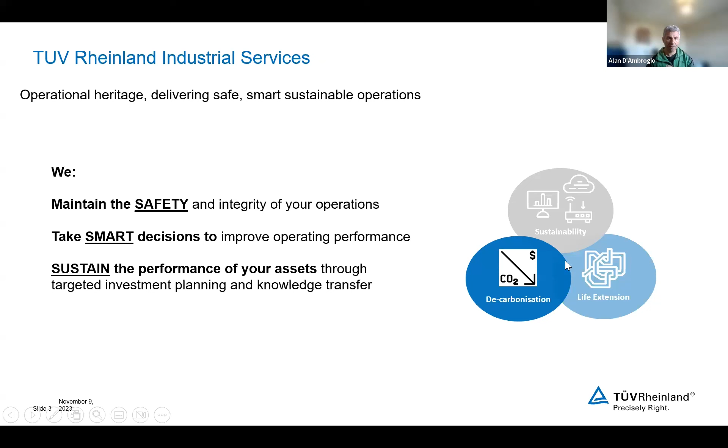You can see we've got three drivers in there around sustainability, helping customers decarbonize, and also extend the life of their existing facilities. You'll see elements of all three of those in the presentation today. I'm only going to show one slide on this because the case study on the right-hand side is what a lot of the webinar will be on today, that Conal will take you through. So I'm not going to show any more of that.

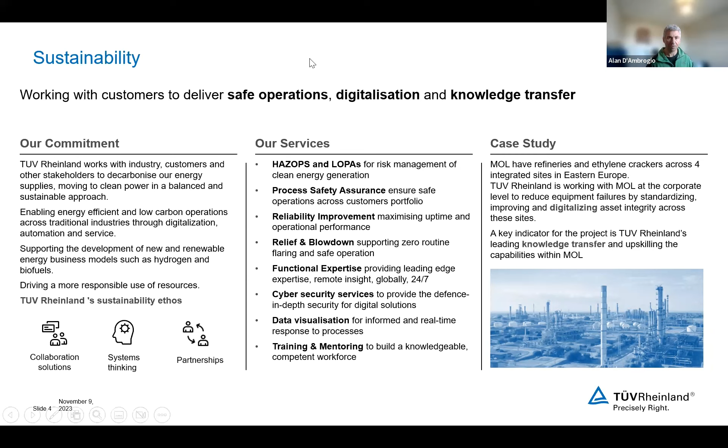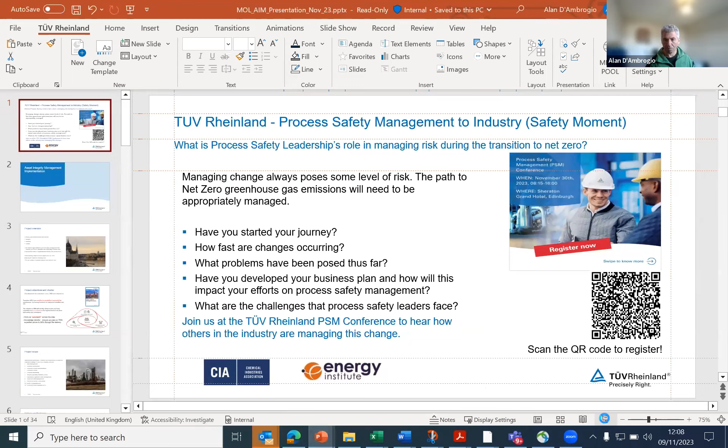Just thinking of what sort of safety moment is in there - we put this safety moment. This is a PSM conference where we're trying to work with the industry in sharing energy transition, but also helping people maintain their process safety, a lot of it tied to asset integrity. If anyone's interested in collaborating, working across both UK and globally around process safety, I think it's a great opportunity to come along, hear what we've got in TÜV Rheinland, and also how different operators approach this - majority of the speakers are from operators. This is sponsored by the CIA, Chemical Industries Association in the UK, and the Energy Institute.

Majority of speakers are not TÜV Rheinland - they're operators who are trying to maintain safe operations, and really looking at how do we manage PSM as we go through energy transition. We're seeing hydrogen being introduced into a lot of sites. We're seeing a lot more co-mingled sites being generated as we go through this energy transition. So great opportunity if some of you are available. This is at the end of this month, 30th of November.

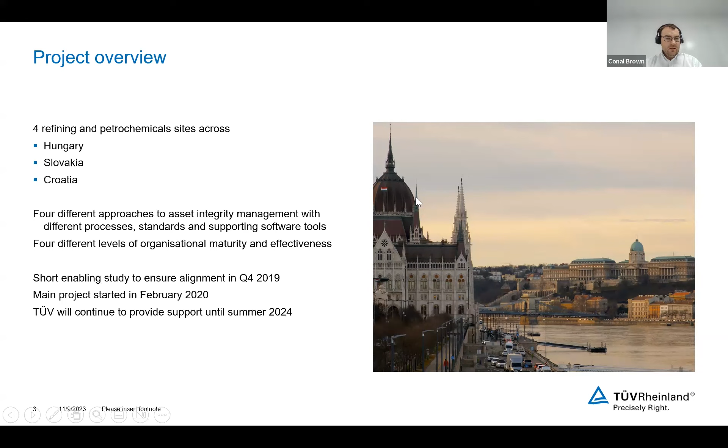The objectives and charter for the project were to transition the organisation from a reactive to a more predictive, preventative maintenance and inspection organisation, by basing decisions on equipment condition and the risk of failure.

The Central European regulatory environment is very compliance driven, and as a result, their inspections were quite compliance driven. So they were inspected to the regulations rather than inspected to the risk.

So the idea was, by adopting asset integrity management systems, they'd identify the most critical assets and focus inspection and remediation activities at the highest level of risk, both in terms of safety and production, and therefore improve performance, improve uptime, and as a consequence, reduce operating costs.

As much as the KPI outcomes, the idea was to get one team working across the site - one asset integrity organisation working in a common way across the 4 sites - and also to transfer knowledge into the MOL team so that they were capable of sustaining the integrity program once we'd stepped away from the project.

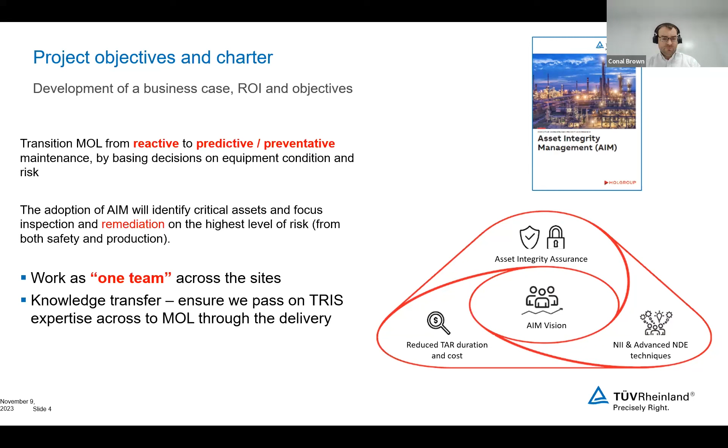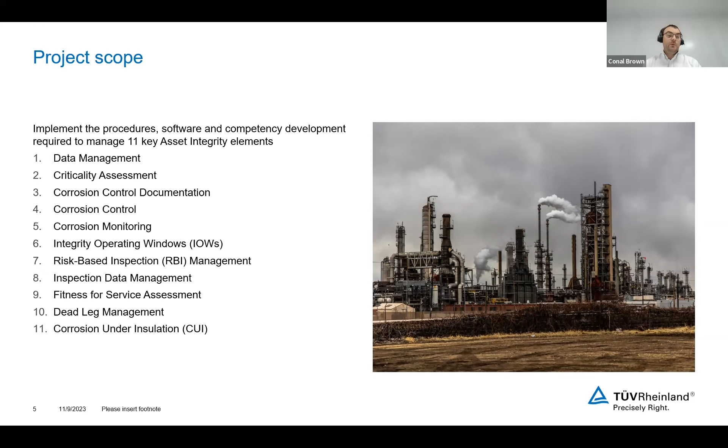So the scope of the project related to 11 key asset integrity elements. This might not be the full scope of everybody's asset integrity program, but this is what MOL wanted to include in scope: data management, criticality assessment, corrosion control documentation, corrosion control and monitoring, integrity operating windows, risk-based inspections and risk-based inspection management, more general inspection data management, fitness for service, dead leg management, and corrosion under insulation.

And then the delivery methodology for this project had - like I say - there was a short enabling phase just to get the alignment on the vision and agreement on how we work together. But the main delivery phase had 3 phases.

The first phase was to show. So this was where TÜV experts in RBI and materials showed the site how to work in an effective asset integrity management program.

So the first point of this was to develop procedures. We agreed on the scope and content for some procedures, then we went away, wrote the detail, and then the MOL team commented and bought into those procedures, and we agreed that was the way we were going to work on the project.

And then we started to implement according to the procedures, do the work, and we'll introduce what that involves in the next slides.

But basically, the TÜV team was leading the work, and the MOL team was supporting the process, providing the data, reviewing the outputs, and learning as they were supporting this. Then in the second phase, we moved into teach and coach.

So this is where we were working collaboratively to deliver the project. The MOL team were starting to deliver the reviews themselves with TÜV support, and while we were doing that, we were teaching and coaching the MOL personnel, getting their competence up to the level where they were ready to deliver independently.

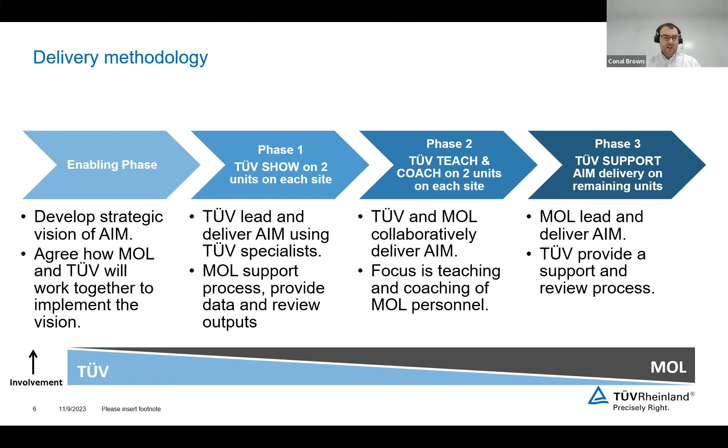Some of these crudes are much more aggressive, and of course the integrity consequence of that means that this distillation unit has got a lot more possible degradation mechanisms, and it's subject to a lot more degradation risks than it was originally designed for. So a lot of integrity challenges for this unit.

Within this project, we reviewed a number of static equipment items - vessels, tanks, piping systems, and safety valves.

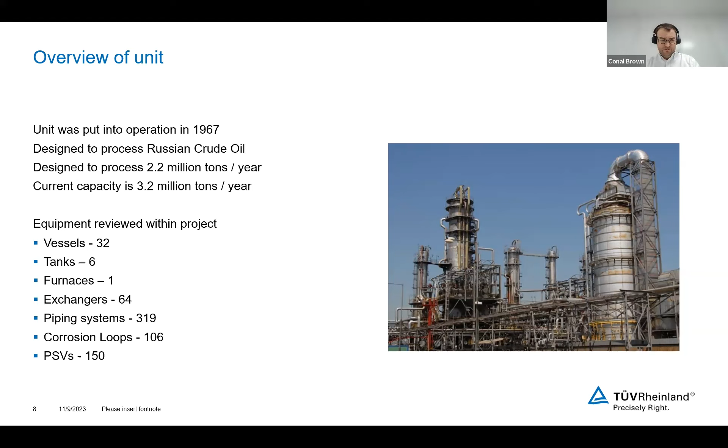The first step was to do a criticality review. We reviewed a total of 105 vessels and identified that 11 were critical, and identified 106 piping circuits and identified that 48 of those were critical. The criticality matrix was a simple 5x5 matrix.

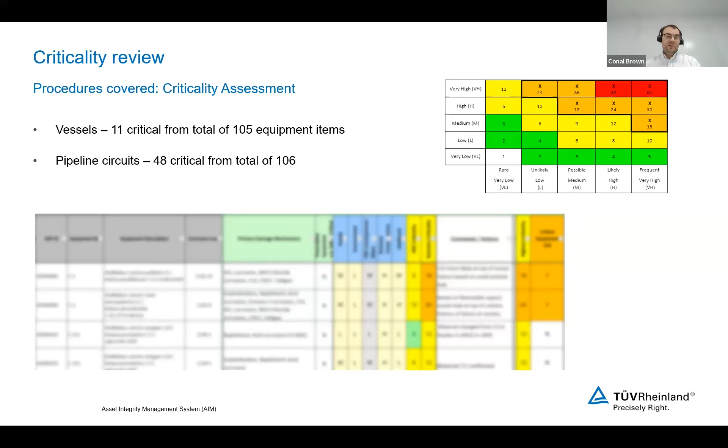Those critical items we took forward into RBI, and the non-critical items still went through a risk-based approach, but with less detail, allied to the lower criticality score that they got.

In terms of information and management of data preparation, we had to collect an awful lot of data with the support of the MOL teams. We gathered that information together and imported it into the Visions software. Then we supported the creation of the corrosion control document.

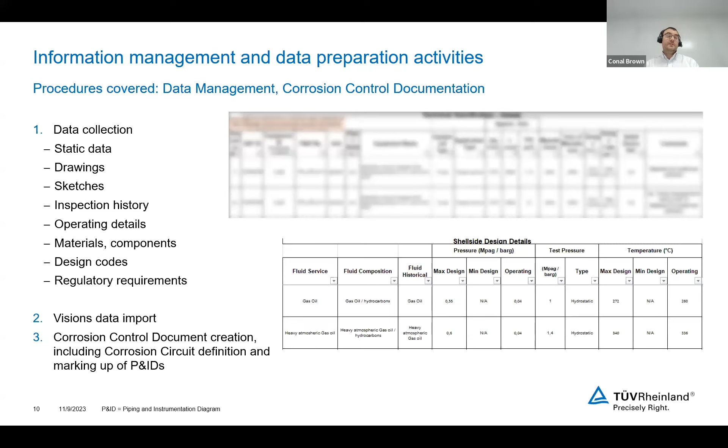That included defining the corrosion circuits, marking up the P&IDs to identify what the circuits were, and then putting the detail into those CCDs, corrosion control documents, at the circuit by circuit level.

Then we did the equipment reviews. In the project, we split this across two phases. In the first phase, the sessions were led with TUV with MOL support, and in that we did 41.

RBI for the critical items and inspection plan reviews for the non-critical items, and for piping we looked at 49. So at the end of the first phase, the TUV team led the production of those 90 inspection plans, some of which started with an RBI, others which didn't, but they did the other elements. We looked at IOWs, dead legs, and did CUI assessments where appropriate.

In phase 2, the teach and coach phase, this was where MOL both collected the data and took the lead in the studies. TUV confirmed that the methodology was being followed as set out in phase 1. We coached and supported the team, and reviewed and validated the outputs to make sure they're reaching the compliant standard.

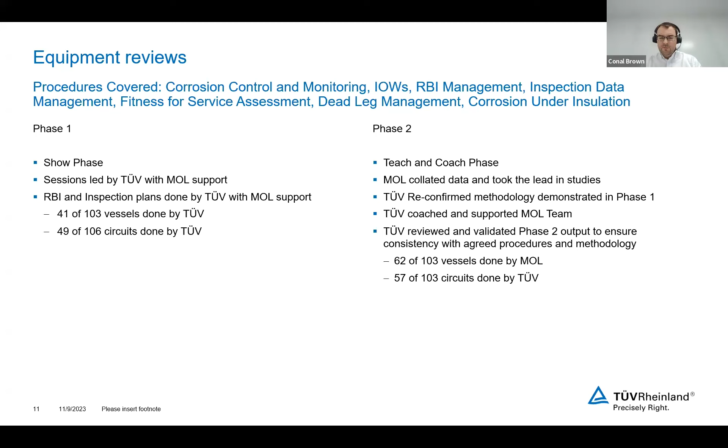So the balance of the circuits were then done by the MOL team, and a lot of the circuits we did because the more challenging work was the vessel assessment. So that's where the best value to the MOL team was for them to lead the vessel, heat exchanger, and tank assessments.

As a result, by the end of phase 2, we'd assessed the criticality of all items on the unit. We developed a corrosion control document, 7 IOWs were designed, and we created inspection plans and intervals for the static equipment on the unit, all defined by the risk level as per the criticality or the RBI outcome.

We produced 700 inspection tasks, a mix of risk-based and regulatory inspection tasks. The team created inspection sketches, identified over 3,500 TMLs, and did corrosion under insulation assessments for all relevant equipment.

We also carried out non-intrusive inspection assessments, and found that 22 out of 32 vessels were suitable for non-intrusive inspection, and 1 out of 6 tanks was found suitable. Sergei's presentation will go into more depth on the NDT techniques that can actually make the NII happen in practice.

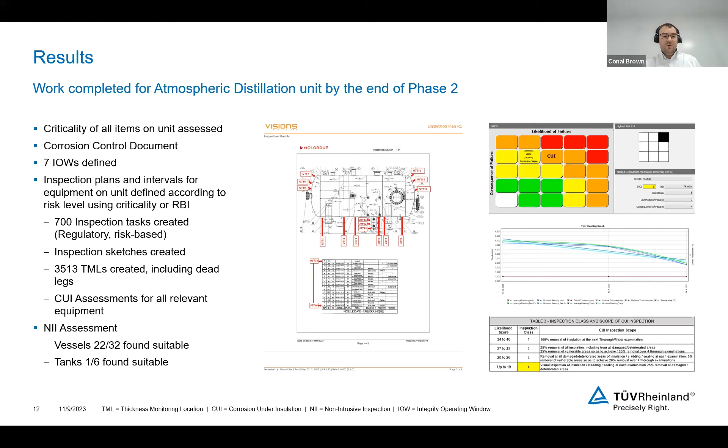Because they are in a compliance-driven regime, not all of this equipment could move over to a non-intrusive assessment, but we had the evidence to make a case to the regulator for a future change in the inspection requirements.

The expected outcomes from the project were a 25% increase in integrity assurance, a 10% increase in availability, 15% reduction in turnaround duration, 10% reduction in turnaround cost, and subject to regulator approval, a 30% increase in the amount of non-intrusive inspection done.

These are the sort of quantitative benefits that we expect from the study, but the real benefit that you can validate is the people development.

So the teams across the 4 sites really did develop this capability to work independently to an agreed standard and ensure a long-term sustainability of this AIM program once TUV step away, and that's validated by audit visits which are ongoing in the current period, which are coming out with good results, with some minor comments, but generally the team is working independently to that agreed standard.

For the process, we have this common work process that increases transparency across the sites, allows for consistency, and most importantly allows the team to share knowledge. So where one team has looked at a unit and reviewed the equipment in that unit, another team on another site with similar equipment can refer back and see, have they missed any degradation mechanisms? Have they not spotted any NDT techniques that another site's using that they could potentially adopt?

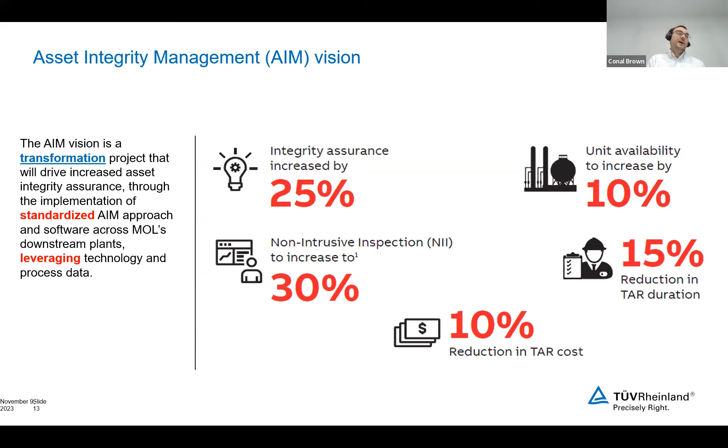So then just to summarize the learning from the project, the two-phase approach worked really well. So that ongoing transition from the consultant providing most of the input to the client worked really well. The remote work was shown to be possible. We had to do it during the pandemic, but the face-to-face interaction is always better.

And finally, the criticality assessment. We worked in 3 different countries. This word criticality seemed to set off red flags. It's a loaded term. So if you're doing a project with different countries, make sure this word criticality is understood by different disciplines and different functions across the different organizations that you work with, because that's one challenge that tripped us up again and again through this project.

So in the next 15-20 minutes, I will tell you about non-intrusive inspection, what it is, what are the benefits of using non-intrusive inspection, and I will give you some examples in a case study. And I will also talk to you briefly about performing non-intrusive inspection on stream while the plant is still operating, and what additional benefits it will bring to you. So I will share with you some examples and a case study as well. The most important for me is to show you the importance of non-intrusive inspection and condition monitoring for successful implementation of asset integrity management programs.

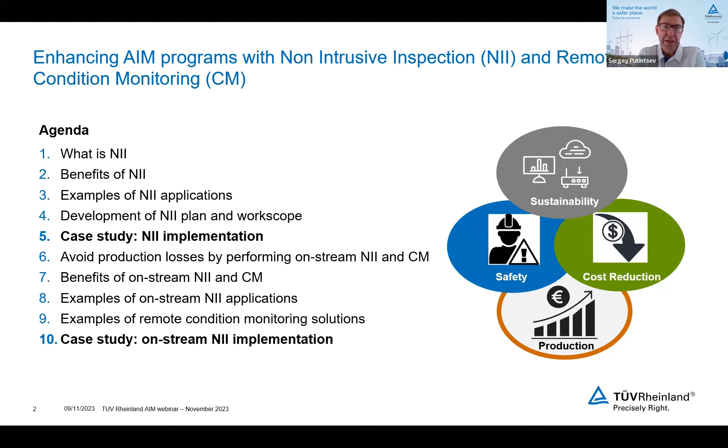So let's start. Next slide, let's look what is non-intrusive inspection. Non-intrusive inspection, or NII, is basically a process in which planning and evaluation of in-service vessel inspection can allow replacement or even deferment of internal visual inspection. Basically, in other words, it's performing inspection from outside of the vessel without entering inside and performing inspection from the inner surface of the equipment.

There are no specific standards related to non-intrusive inspection, but the best known one is recommended practice G103, which was originally produced by DNV, and a lot of people still recognize DNV recommended practice G103, but then the ownership of this document was taken over by HOIS. HOIS is a UK joint industry project, which has a combination of members from operators, from NDT companies, as well as from regulators. So they took over the ownership of this recommended practice, and the latest version was published in 2020 under the HOIS RP 103. And this is probably the most common document that's used worldwide for implementing non-intrusive inspection.

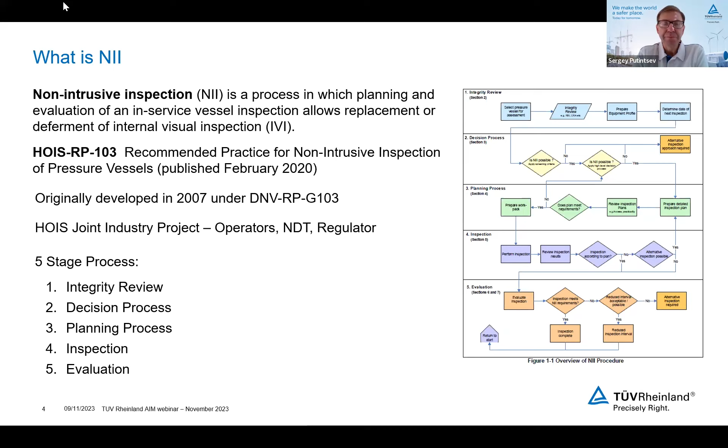Next slide, please. So what's the benefit of non-intrusive inspection compared to internal inspection? And obviously there are a lot of very significant benefits from non-intrusive, especially when the maintenance or repairs of the vessels are not required. So therefore, there is no need to empty the vessel or tank and prepare it for the internal inspection. And in these particular cases, non-intrusive inspection, and later on I will tell you, on-stream non-intrusive inspection, has a lot of advantages.

First of all, it's a safety element because it avoids human entry inside a vessel, which is commonly a confined space. And please bear in mind that it's not just the inspector who enters the vessel. It's a very large number of other personnel, the cleaners, the maintenance people to prepare, for example, scaffolding, to prepare the surfaces, and also even the operators themselves, because commonly they need to supervise the confined space entry.

So there is a number of people who would have to come inside of the vessel, and that all creates additional safety hazard, which can be avoided by inspecting the vessels from outside. Secondly, non-intrusive inspection requires much less preparation of equipment for internal inspection, and that overall will save time of the turnaround. So you can reduce the duration of turnaround by doing the inspection from outside of the vessels rather than preparing them and then putting them also back in operation.

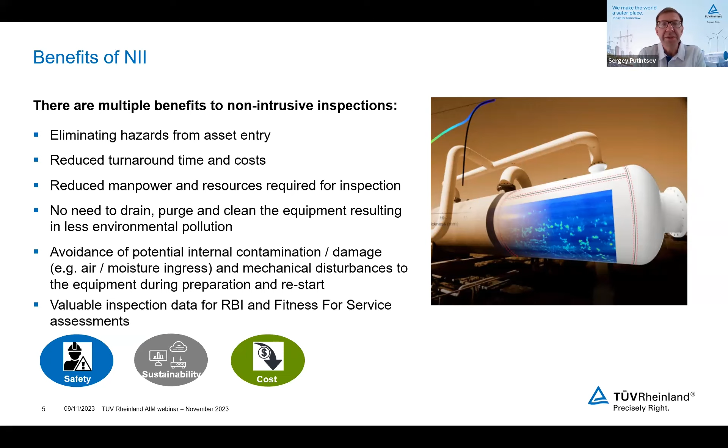And last but not least, all non-intrusive inspection commonly requires advanced NDT techniques, which means that all the data you collect is in electronic digital format straight away, and this is extremely valuable data for your risk-based inspection and fitness for service assessment. Next, please.

So what advanced NDT techniques are used for non-intrusive applications? This is not an exhaustive list, but this is what TÜV Rheinland is using on a regular basis. For in-service weld defects, which is, I would say, one of the common applications, we're applying time-of-flight diffraction, TOFD, and phased array UT. Another very common issue and challenge experienced by most of our customers is corrosion, general corrosion, but also corrosion under insulation. So there are a few techniques that we apply.

One of them would be pulsed eddy current. We are very experienced in performing this inspection. It's a screening technique without removing insulation. If you have vessels or tanks, another very effective technique for screening for leakages, cracks, as well as active corrosion is acoustic emission testing. And if you have pipelines, also commonly under insulation, then we would always recommend long-range UT, sometimes called guided waves. This is also a very good technique for your non-intrusive inspection.

Lastly, I mentioned high temperature hydrogen attack as a damage mechanism because it's a very severe and dangerous damage mechanism happening commonly in the chemical and petrochemical industries on aging plants. And the trick here, the requirement, is to detect the HTHA damage at very early stages, which is very, very difficult. And for that, you need to apply a variety of advanced non-destructive techniques in order to screen the material and find the early indications. Next, please.

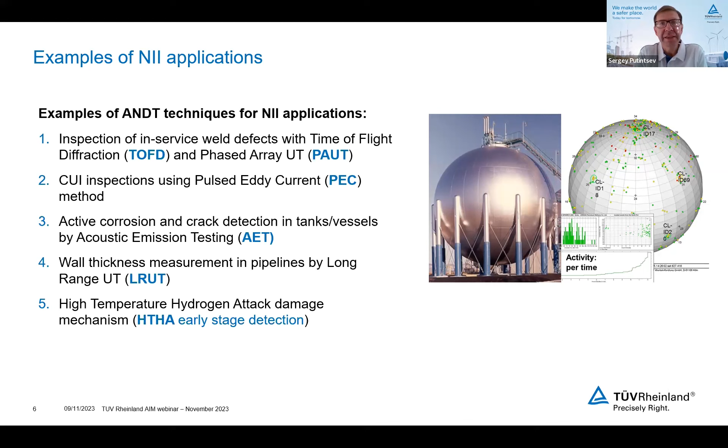So once you established that you can apply a non-intrusive inspection approach, and it's part of your inspection strategy, you need to develop a methodology. And again, we would recommend to follow the Recommended Practice 103, where the process of non-intrusive methodology is quite well defined. Commonly, you start with definition of vessel zones, because the risks of the vessel depend on the zones, and that's why you put them in different high and low category zones.

You need to define degradation types and damage mechanisms. This is absolutely necessary. And on that basis, you prepare your inspection work scope in terms of locations and coverage, which is based on a number of factors listed here. You need to factor them into the calculation. And then at the end, you have your locations that need to be inspected, and you select the advanced NDT technique that is the most applicable technically to provide you with the data that you want to achieve. Because obviously, if your damage mechanism is corrosion, then you're using an advanced NDT technique best focusing on the corrosion.

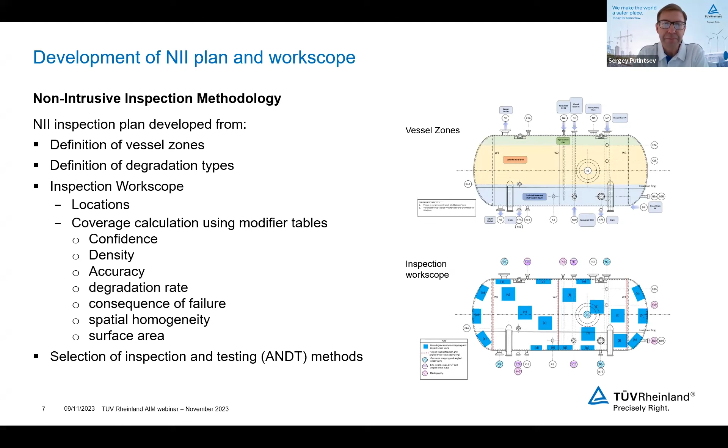If you have some stress corrosion cracking, for example, or if you have cracking in the welds, then obviously you need to select a different NDT technique to establish that. Next, please. One quick case study, which is a good illustration where non-intrusive inspection works very well.

Our colleagues were performing statutory regulatory inspections at an offshore installation, and one of the equipment that required internal inspection was a diesel storage tank, and that was the only source of fuel for powering all electricity on an offshore platform. And for obvious reasons, performing inspection from inside would mean that all the diesel would have to be moved out of the tank, and that would physically stop all electricity supply into the platform, which the owner obviously was not able to afford without very thorough planning and shutting down the whole platform for the duration of inspection.

So our task was how to assess the condition of the tanks without actually stopping its purposes. And it was quite an old, over 40 years old asset with history of corrosion and small internal lining issues. And obviously there was critical risk of environmental as well as a production threat if there is some problem with the tanks.

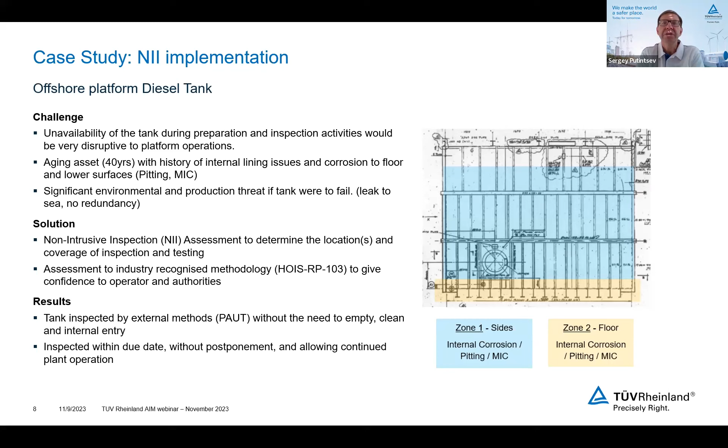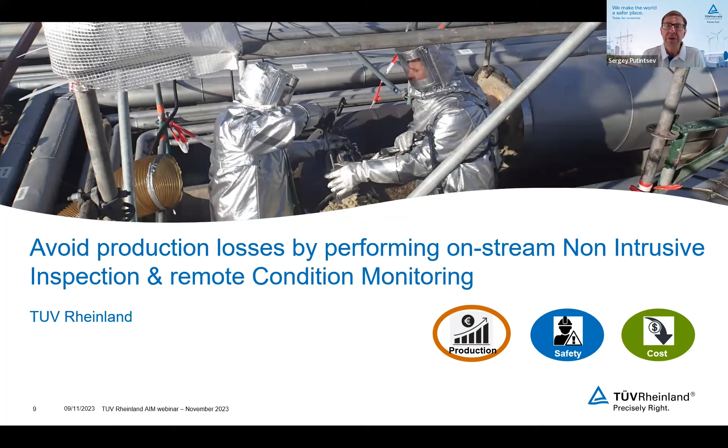So how can you then perform non-intrusive inspections on stream when the plant and the process equipment are still operating, and how can you also add remote condition monitoring to collect verifiable integrity data of your equipment, and do all of that without stopping the plant, without doing it either during turnaround or during unplanned shutdowns. Let's look at that.

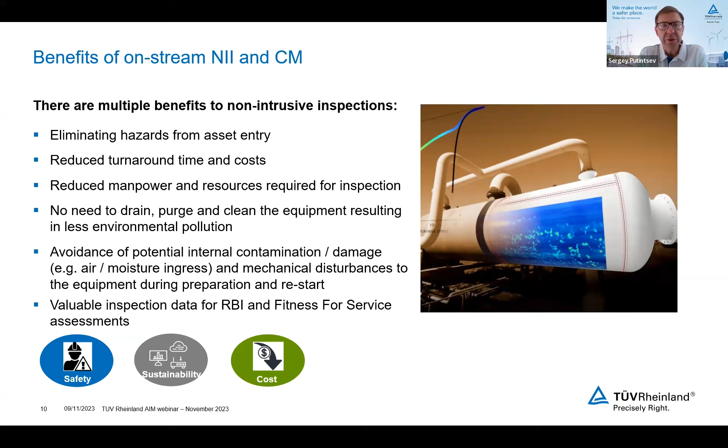So if we look at the benefits of on-stream non-intrusive inspection, they are, first of all, the same as what we already had previously. But in addition, you have some very significant further benefits. And the biggest benefit that we can see and our customers are feeling, first of all, is reduced turnaround time, because you can significantly reduce the scope of your turnaround inspections by performing pre-turnaround inspections.

So you're moving some inspections from your turnaround windows into time when you can plan it, you can prepare everything from outside, and you're not scheduling it at the same time when you have maintenance, when you have other inspections, and a lot of things happening during the turnaround time.

Secondly, very important, you optimize your inspection and maintenance planning for the turnaround, because you're already getting a lot of data about location and size of your damage. You know exactly what to repair, when to repair, what materials you need. You can pre-order some replacement. So that's another great advantage of doing it on stream.

And potentially, depending on the situation, case by case, we had examples when you can agree with the authorities that some of the inspection can be done on stream without performing the same inspection during the turnaround, and that reduces your overall scope.

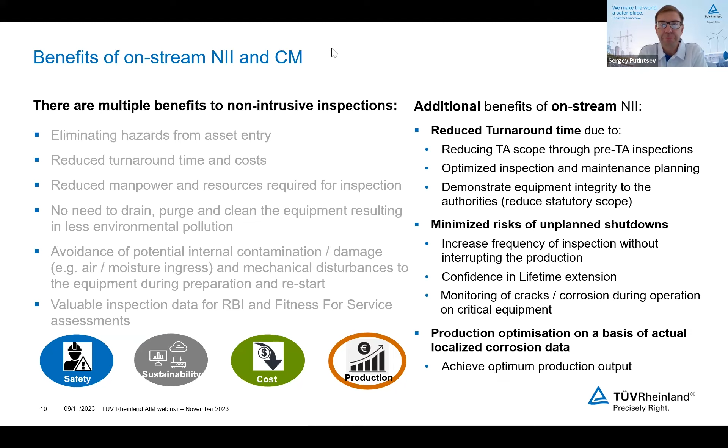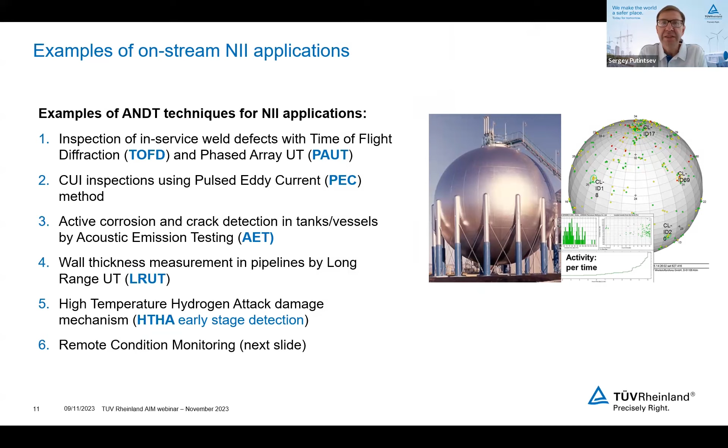Pulsed eddy current generally doesn't require high temperature because it comes through insulation anyway. This only applies when, instead of insulation, you're doing coating and the client doesn't want to reduce or remove coating, and that's why the surface temperature could already be quite high. But for all other techniques like TOFD and phased array, we're going nearly up to 500 degrees C, and this is the surface temperature of the objects that we are inspecting.

And when we're talking about remote condition monitoring, and I have a separate slide next on that, then depending what you monitor, we can go to even very, very, very high temperatures.

Very important to mention that there are no international standards for high temperature NDT inspection. So everything is bespoke. The testing is performed on the basis of internal procedures, which should include specific test validation on a mock-up, as well as very strict safety requirements, because as you can imagine - you can see it a little bit on the pictures there - performing inspection at high temperature causes quite a lot of safety concerns for the operators. But our team is very much experienced, doing this for over 20 years.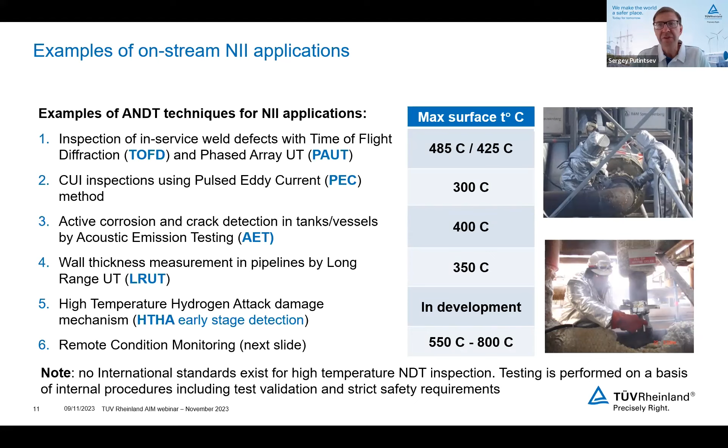I promised to say a few words about remote condition monitoring, because the difference - how to say - non-automated condition monitoring is that you can collect this data through periodic inspections on a regular basis, but you can also obtain similar data by placing sensors. There are different types of monitoring, very commonly known for many years already. It's vibration monitoring on rotating equipment, but nowadays we see more and more developments into static equipment, and here we're mainly talking about corrosion as well as creep and creep fatigue. Within our company, we apply all of that, dealing with vibration monitoring, but also corrosion monitoring.

You can see an example on the right-hand side on the smartPIMS, as well as using UT sensors, and on the bottom right an example of corrosion monitoring using pulsed eddy current at high temperature. And then we also have various strain gauges in order to monitor creep and creep fatigue on various plants.

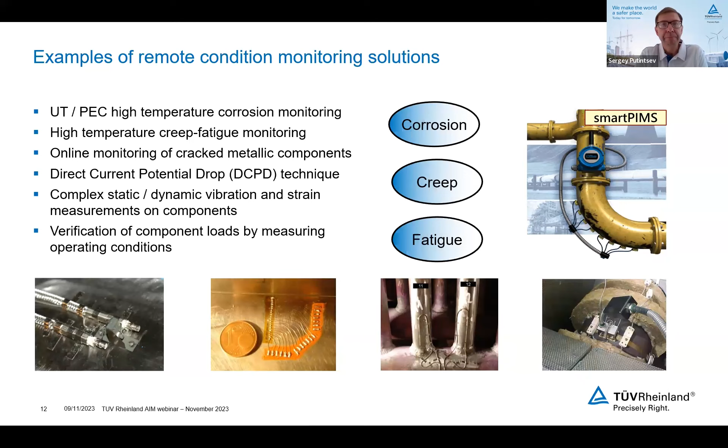And I'll share with you just one case study for on-stream non-intrusive inspections. I have to say this was quite typical - we performed this job in South America, where there were damage indications found during the turnaround inspection on two critical vessels. It was the diesel reactors, quite big, 17 meters high.

But the customer had to put both of them back into service and requested to confirm the presence of the defects, but more importantly, locate and size them so that the maintenance and repairs could be planned accordingly. So what we offered the customer was to perform on-stream inspection at high temperature - the temperature of the surface was 370 degrees, with a wall thickness of 114 millimeters.

We applied our TOFD and phased array technique to make it very efficient. It was quite a big team from our side there, over 12 people, plus the project manager.

And as a result of our inspection, we confirmed the damage, but more importantly, we located and sized the damage, and that allowed the customer to schedule the necessary maintenance and repair and prepare everything, because we knew exactly - some replacement equipment they ordered, and the rest they prepared for the repairs during the short-term plant shutdown. So that's just one example of how you can apply this on stream.

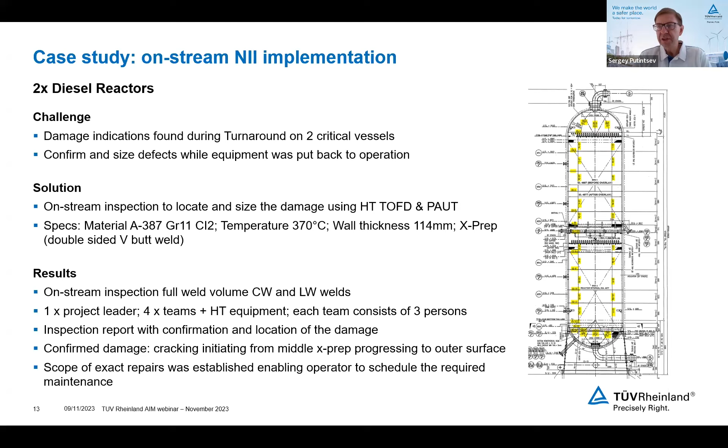And my last concluding remarks, so that we have some time for questions. As I mentioned earlier, non-intrusive techniques play a very important role for any RBI and overall asset integrity management. The methodology is widely accepted by the industry and also by the regulators, which is important.

And non-intrusive inspection, advanced NDT and condition monitoring bring a lot of benefits - safety benefits, sustainability benefits, cost reduction, but more importantly, increase of production by avoiding stoppages, avoiding planned or unplanned shutdowns. We certainly recommend following the recommended practice from HOIS 103, a very good document with a lot of guidance there.

And please use competent and experienced people for non-intrusive assessment, especially for on-stream applications, because the material properties change significantly. The test equipment and NDT test equipment changes also significantly. And this is the reason why there are no standard international standards for high temperature inspection. Anything above 60 degrees Celsius requires a bespoke approach.

And lastly, remote condition monitoring using sensors is a very, very effective technique to optimize your plant operation and also keep it within the limits of your integrity operating window. Thank you very much.